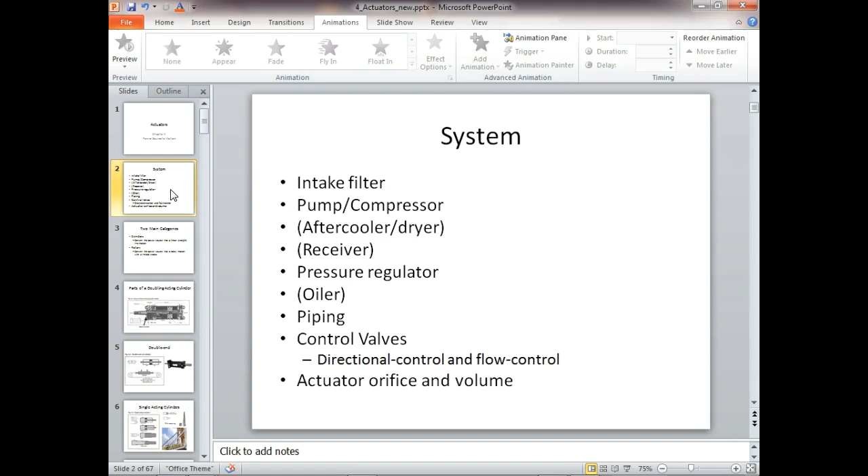Well, basically we had to deal with, well, we did a little bit with speed. That force is equal to pressure times area.

But you got to remember, if you got a cylinder that's a single rod cylinder, we do have multiple rod cylinders. We have dual rod cylinders. If you got a dual rod cylinder, that means you got a...

Let me go ahead and start this one, so I have some place to write.

Well, if you got a dual rod cylinder, this would be a symbol of a dual rod cylinder, where we have a piston, and then we have two rods coming out the same size. The rods would be the same size, so there's no such thing as push and pull. Here we would have to say left, right, up, down, or something like that, because there's no push and pull. But if I've got a single rod cylinder, which is all our questions are written up on...

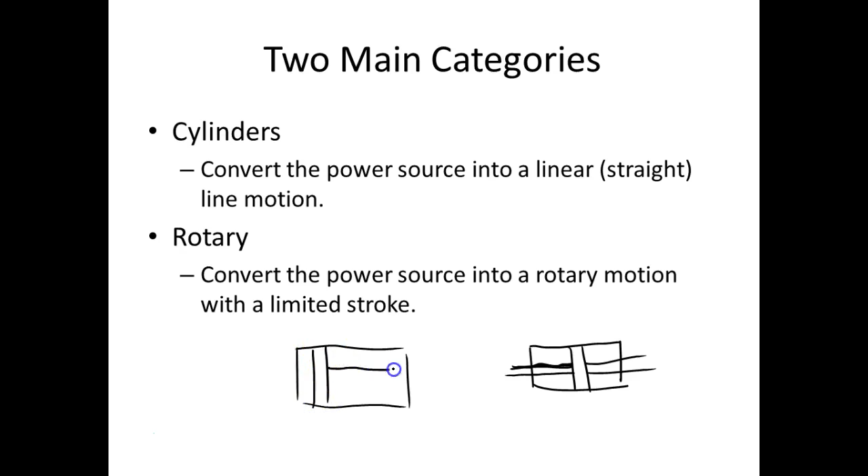And so what I've got, if I'm pushing on the bottom, I've got the complete diameter that I'm pushing against. If I'm pushing against this side right here, then what I've got is this diameter right there, because that's the only place I'm pushing on. All the rest of it is pushing into the rod. And of course that doesn't cause any problems because the pressure is equal all around that rod, right? And the rod can't move, so you can't move it left or right.

But what we have here is a piston, and we have a low pressure side and a high pressure side, and now we've got high pressure and it's going to move it toward the other, but it's only the area that it's pushing against, right? So the formula is force is equal to area times pressure.

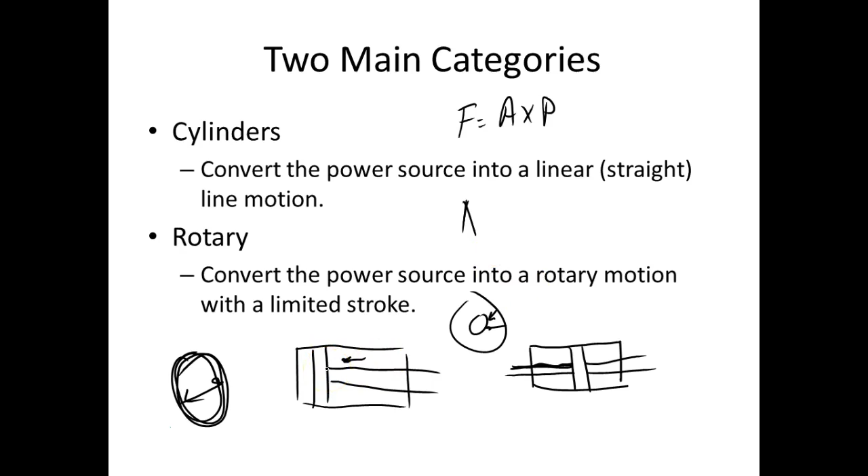Well, if we're extending, then that's true. But if we're retracting, or what is also called a pull - push would be pushing it out, and pull would be pulling it back, right? Then your force is going to be equal to the area of the piston minus the area of the rod, times the pressure.

Because that's what we got. That's what we got pushing, right?

I don't know, and I think in that question that would be true, because I think we had a 4-inch cylinder. You got that backwards - the big area is the area of the piston, which I think was 12.57, right? And you're going to subtract from that the area of the rod, which was 7.66. And that would be the amount of area you have when you retract it.

Yeah, the push would be the extend, and the retract would be - I think I went in on the retake, and I actually went in because that question got asked a little bit. I put in parentheses retract and extend, and I went back and put that on the actual test too, so y'all wouldn't get those confused.

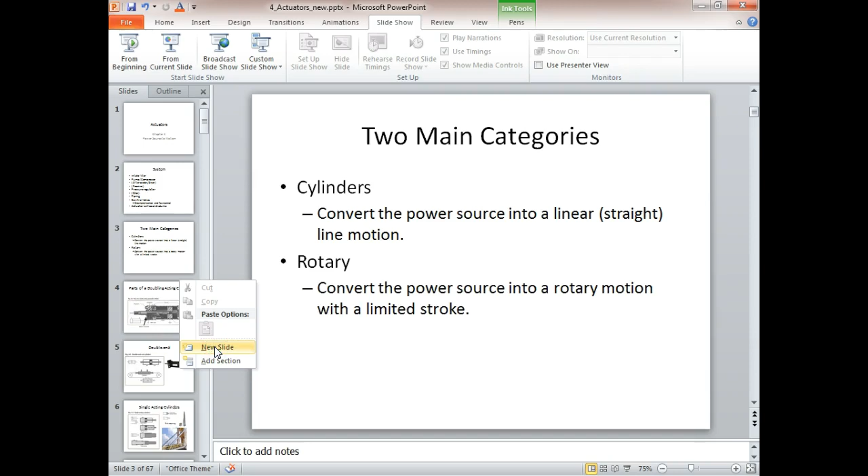So what does it say? By area. And of course that's a relative term because that's cubic inches per minute. And the problem is our flow rate is given in gallons per minute, right? So what we have is a conversion factor.

And what is the speed? It's got to be in some unit, like miles per hour. When I give speed, I give it in 2 units - how far with some time. For this formula it's different. We said a different formula in the handout I gave y'all, because that's in feet per second. But the one in the formula book is cubic inches per minute. No, that's the flow rate. That would be like saying how fast you're going, and you say cubic miles per hour.

So what speed is given? It's going to be in inches per second, or inches per minute. So your flow rate is a volume, your speed is a unit over time, right? You understand that? So this formula they give you in that book is inches per minute. And of course the one I gave you on the formula sheet is feet per second, but it's no big deal - it's the same thing. In fact, it would be easy on a short cylinder to use inches per second.

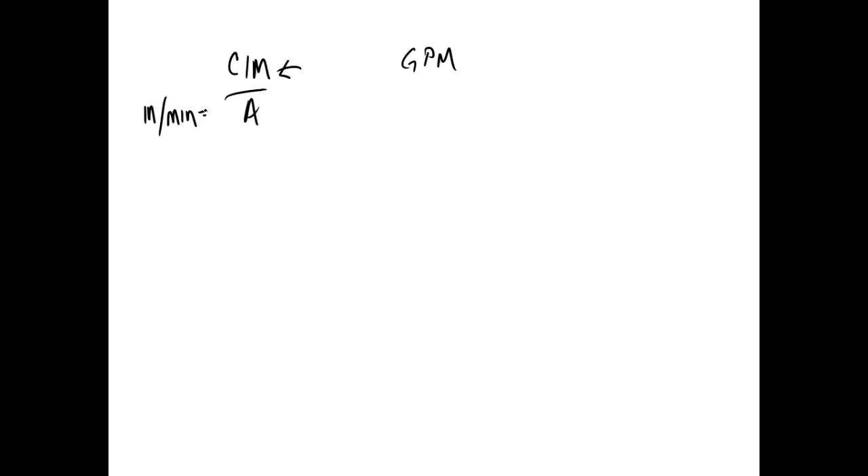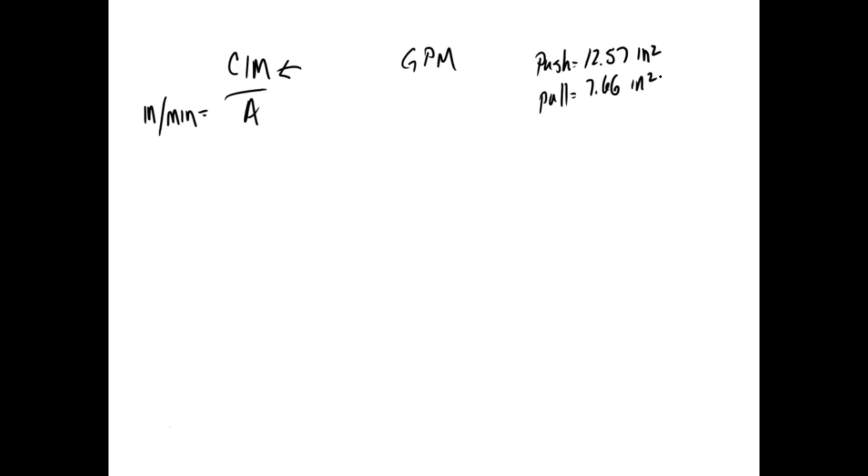Okay, so first thing I got to do is come up with what it says - the speed we got. So what's our 2 areas? My push area I think is 12.57, and then my pull area is 7.66, I think, if I remember right. Okay, so that gives us the number we put on the bottom. Now we got to come up - my flow rate is 8 gallons per minute. So somehow I got to go from 8 gallons per minute to cubic inches per minute.

So what's the conversion rate for hydraulic fluid? It's in there somewhere. And that's what's a little nicer about using the formula sheet - it gives you the conversion factor for gallons per minute to cubic inches per minute. This is nice, guys, but you got to understand this is a pretty common thing that we use. If it's pretty common, odds are in this book there's a table out there somewhere where you can look up your area and compare that to a flow rate, and it gives you the speed.

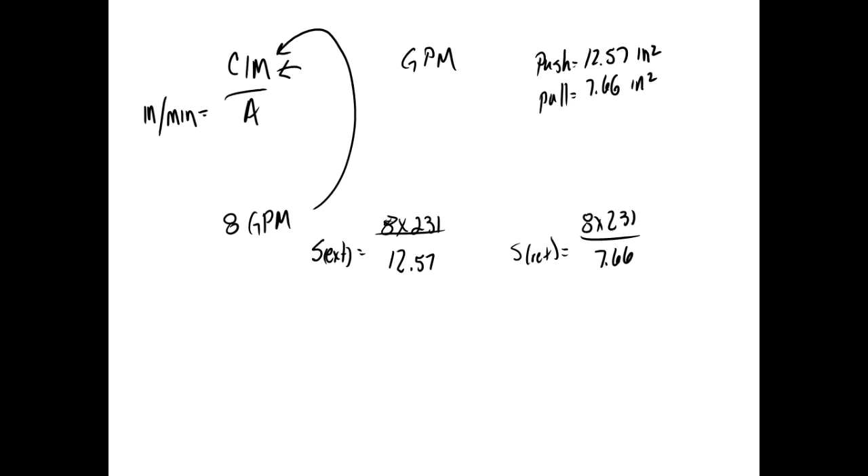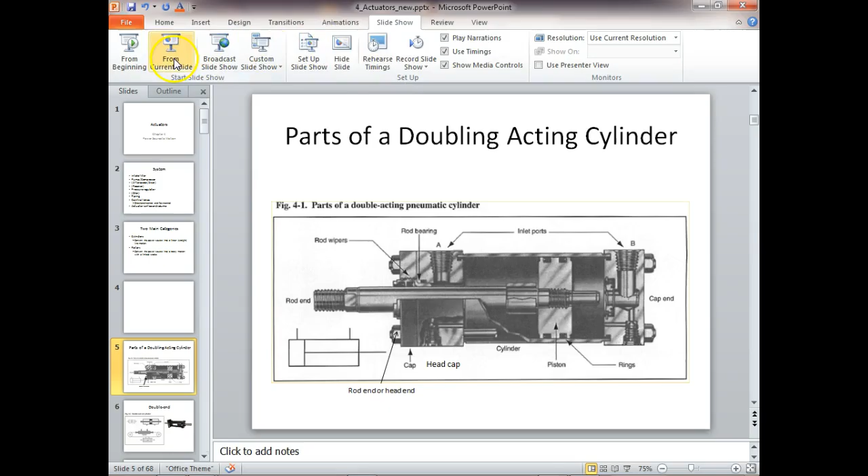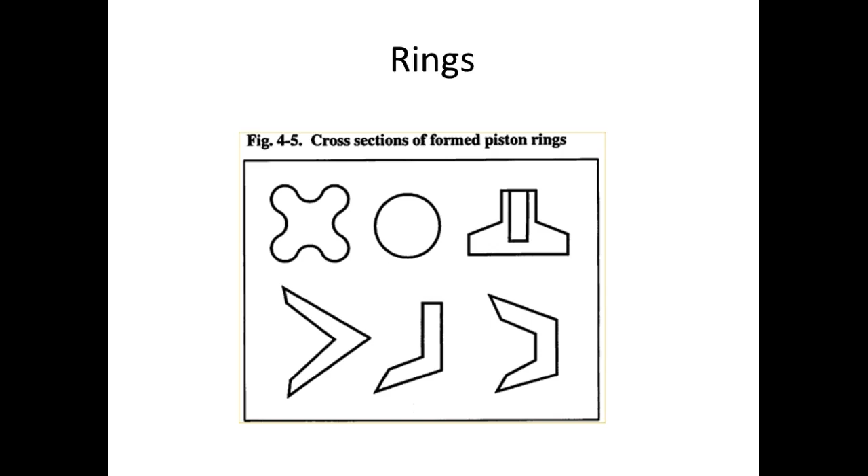We looked at the different types of cylinders that we could get. We didn't talk much about the rings or the seals that they put inside these things. We talked about the different ways of mounting the cylinders. This was pretty interesting too, they give you the illustration.

Unfortunately I hadn't been able to find one for hydraulics. But if you look under course content, then there's one in there called reference materials. There's a really good data book that I don't know if you want to download it or put it on a thumb drive, especially if you get out of here. This is Mead's Pneumatic Application and Reference book.

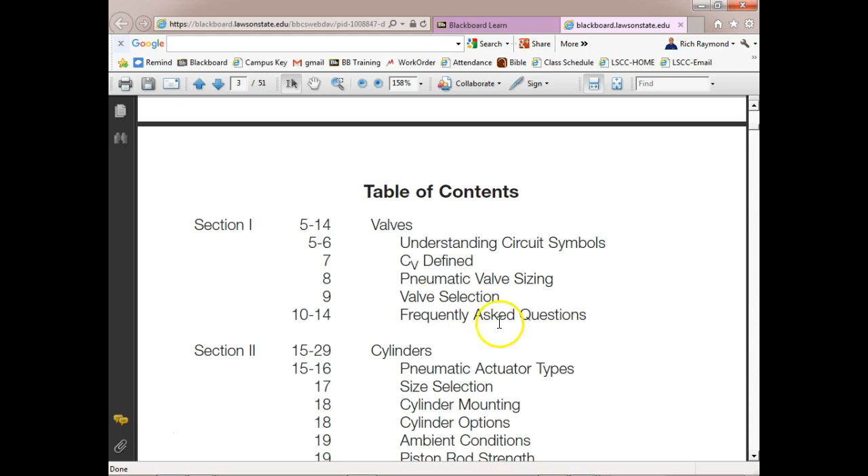And what we're going to talk about in a minute is something called a CV, it's a coefficient of velocity. But another thing that I like that they provide in the book is they give you all the symbols. These are pneumatic symbols, but a lot of them are crossed between the two systems, very, very similar. We do hydraulics a little different. On pneumatics, what we do to regulate pressure, we use a pressure control valve. What we do on hydraulics is we use what we call a pressure relief valve, and we'll look at the difference there. But there's very similarities on what we do there.

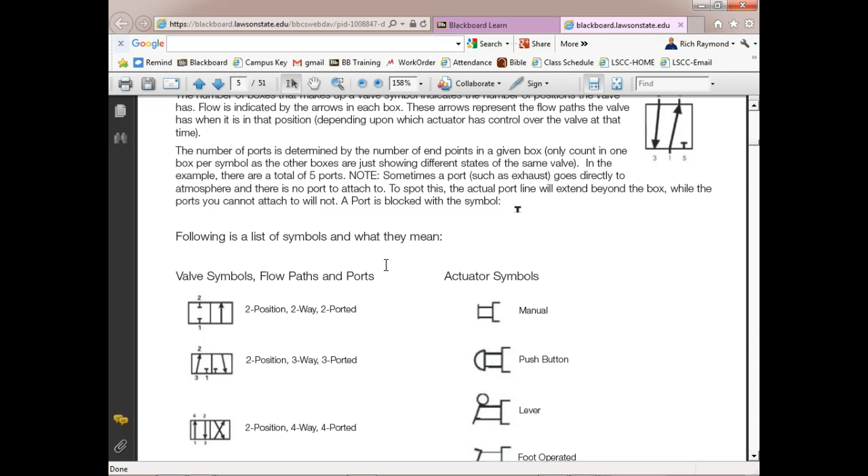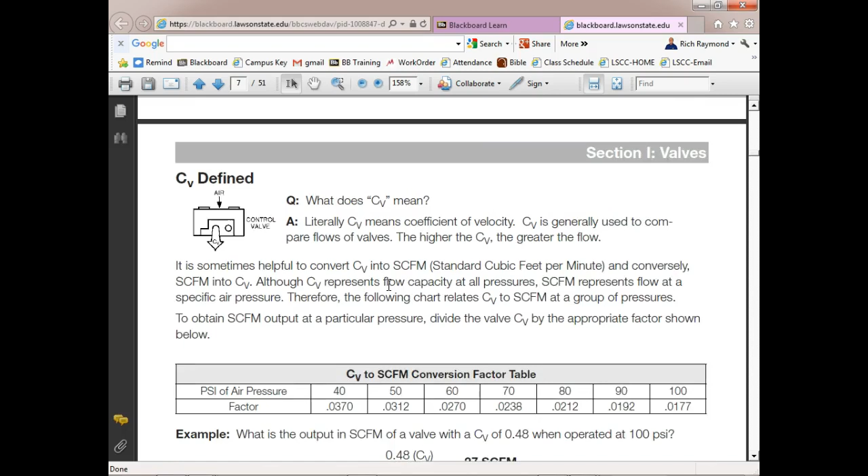And the different types of valves, the different types of operators. And then this is CV, we're going to look at that in a minute.

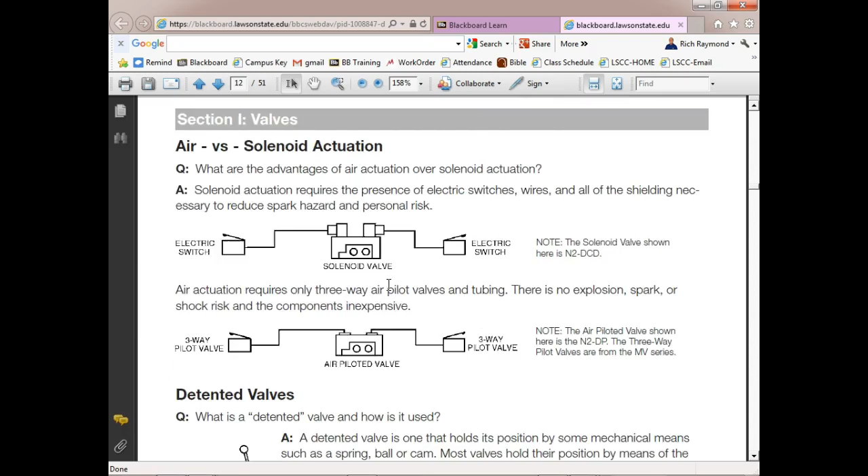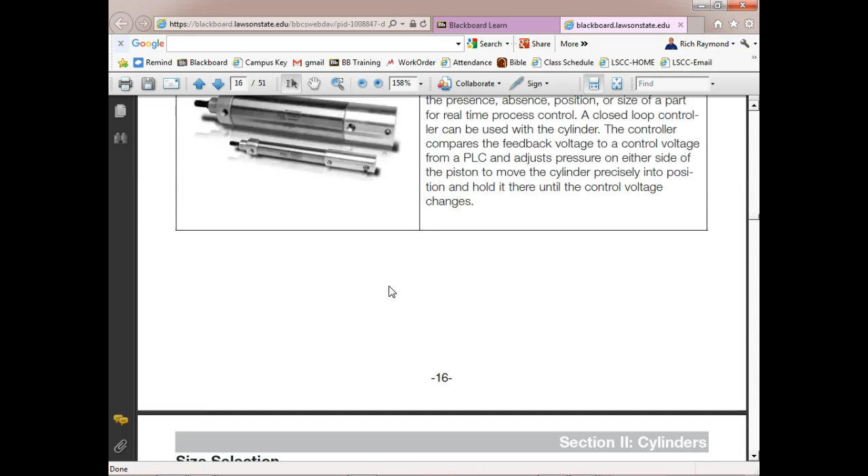And then another thing that I noticed that is pretty interesting, if you think about it this really comes into play, is how much force you need to generate to lift the load. Well, how much force do you have to generate to lift the load? Well, it actually depends on the angle that you're trying to lift it.

Yeah, this book is on blackboard. And of course we're not going to deal with this on the test, but this is just some place where you get out there and you got to calculate how much force you need, or what size cylinder you need, or what size valve you need to run a system. And most of that stuff is out there available to you, so you don't have to do a lot of math, you can look them up in charts. But there is some math involved. So what actually determines the amount of force required to lift the load is the angle that you're trying to lift it at.

So as the angle goes up, you would have to use trig to calculate this out. What this would do is tell me a multiplier that I would use to determine how much force I need to generate to lift the load at an angle.

Of course, if you're lifting it straight up, then you just got to lift the load, right? But if you're pushing it out, then you not only got to move the load, but you also got to overcome the friction that the load is pushing. And then when you start changing that angle, the actual weight is distributed on different angles on what you're pushing, right? Does that make sense?

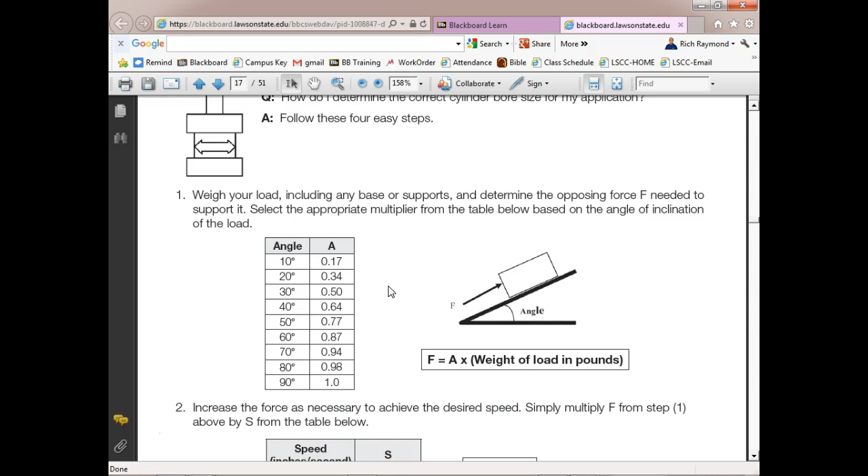So this is a neat thing. But what I want to do now, guys, is ask: do y'all have a formula for the CV rating of a valve?

So what we've got to do is, if I'm going to run a cylinder and I'm trying to run it at a certain speed, then I've got to assure that I get the flow to the inlet of the cylinder. So what sets the speed? It's not the flow in the system, it's the flow that comes into the inlet of the cylinder, right? So what determines the speed is basically the flow rate.

Of course, what determines the force is how much pressure you have. So we could have a lot of pressure in a small flow, or we could have a lot of flow in a little bit of pressure.

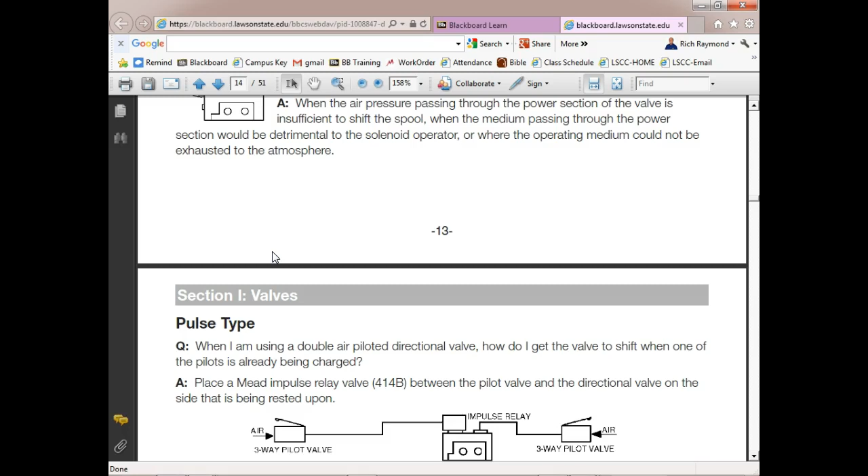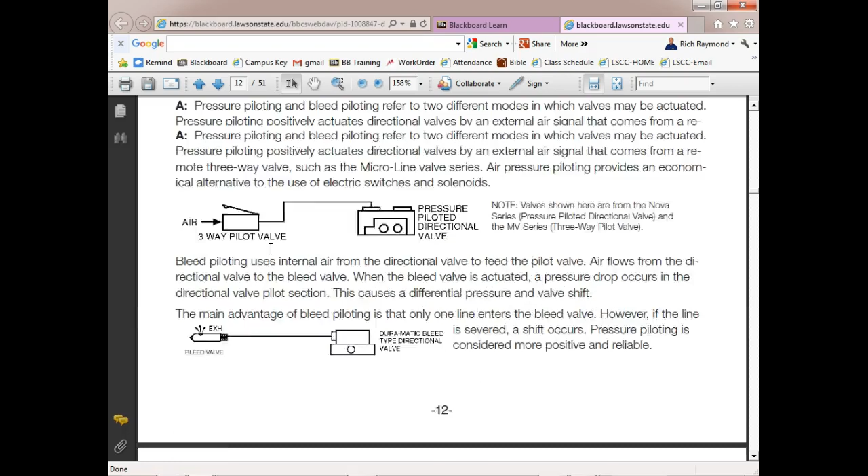So the CV rating of a valve is basically how efficient it is at moving fluid through the valve. And this is a U.S. customary rating, so if you get into valves that are used a lot outside of the United States, then you probably won't see a CV rating on a valve. But if you get into a company that sells a lot in the United States, even though they're a foreign company, odds are they're going to list that CV rating on the valve.

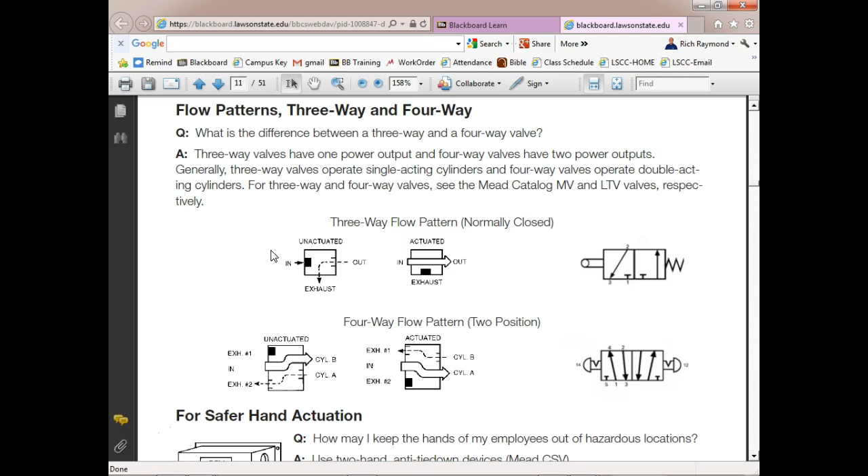So when we buy compressors, two things it's going to give us: the maximum pressure that it can generate, and the flow that it can maintain at different pressures. If you ever look at a compressor, it'll give you basically two values. It'll give you the maximum, so at the maximum pressure, you should have the minimum flow, right? And at the minimum pressure, you're going to have the maximum flow.

So if you ever look at a standard compressor that uses an intermittent motor and a reservoir, it's going to give you two flow rates. Usually it gives you what we call standard cubic feet per minute. And what is standard cubic feet per minute? What is it?

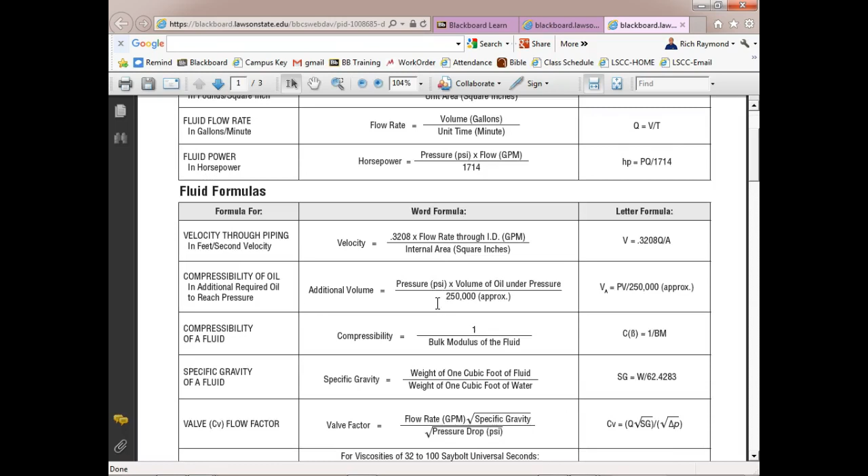So this sheet right here, here it is. Valve CV flow factor, so this is the formula right here. So what do I need to know? The valve factor, I need to know the flow rate in gallons per minute. And what do I need to know? The specific gravity, right, divided by the pressure drop. Not the pressure, it's the pressure drop.

So if you look over there on the right hand side, it gives you a break. Normally in engineering, if we use a change in, meaning I get a different value on this side than that side, or vice versa, we use the Greek symbol delta. So delta means a change in. So if I've got 60 psi out and 65 psi in, then the delta P would be 5. You understand that? We'll run into that a lot, especially in electronics. We ran into it last night in my solid state class, where they had the little delta, and it was a change in one current relative to the change in another current. But you'd have to know the change, how much it changed.

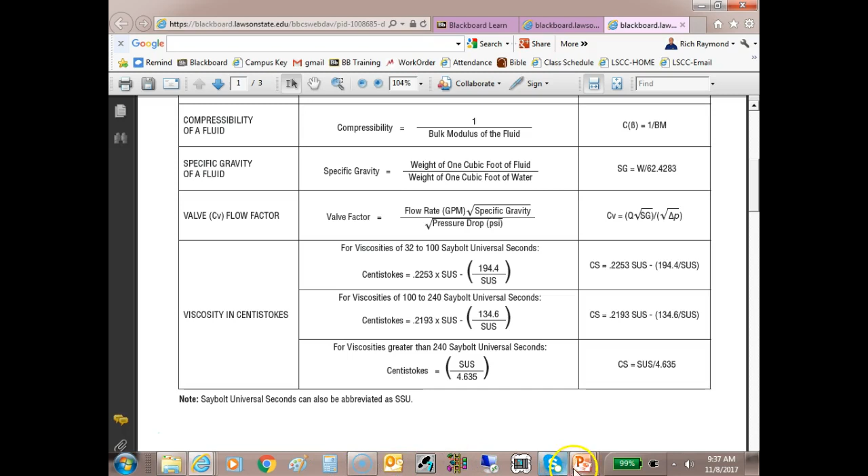In this book, since this is related specifically with pneumatics, it makes it a lot simpler. So this tells us right off the bat, if I know my gallons, if I know the CV rating of my valve, and I know the factor according to the pressure that's moving that thing, then I can calculate the number of cubic feet per minute that I need. That makes sense?

Or if I know my cubic feet and I know the factor of my valves, then I could flip this around and calculate the CV of the valve that I need. So what would be the formula for the CV rating of the valve? Can you see the formula is using cubic feet per minute equals CV over a factor that they give you out of a table.

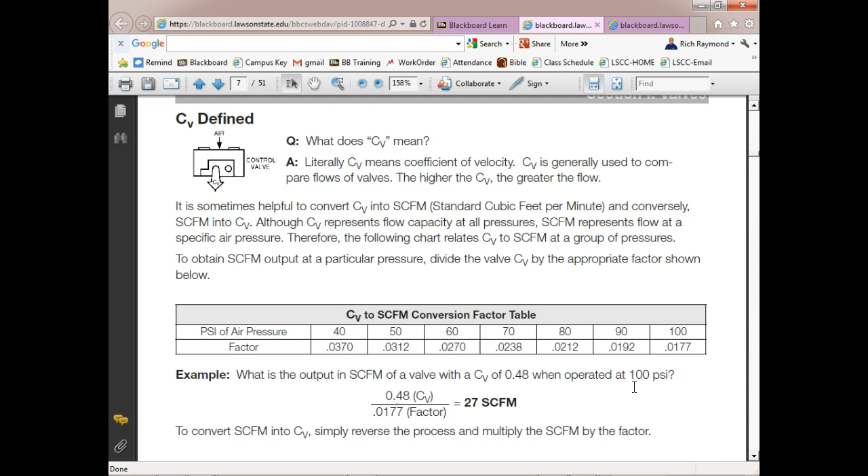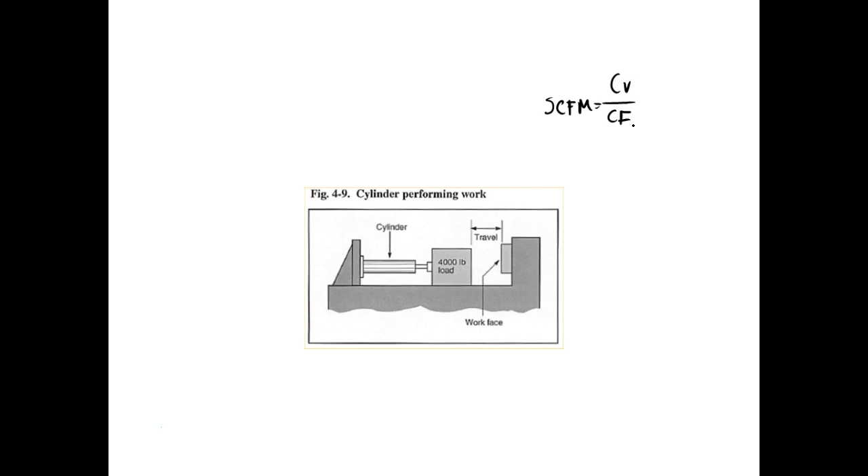So standard cubic feet per minute equals the CV over a conversion factor. So that means if I knew the standard cubic feet per minute that was available for my compressor, how could we solve for CV? We could put it in our little formula: standard cubic feet per minute, CV over conversion factor. So my CV would be equal to my standard cubic feet per minute times my conversion factor.

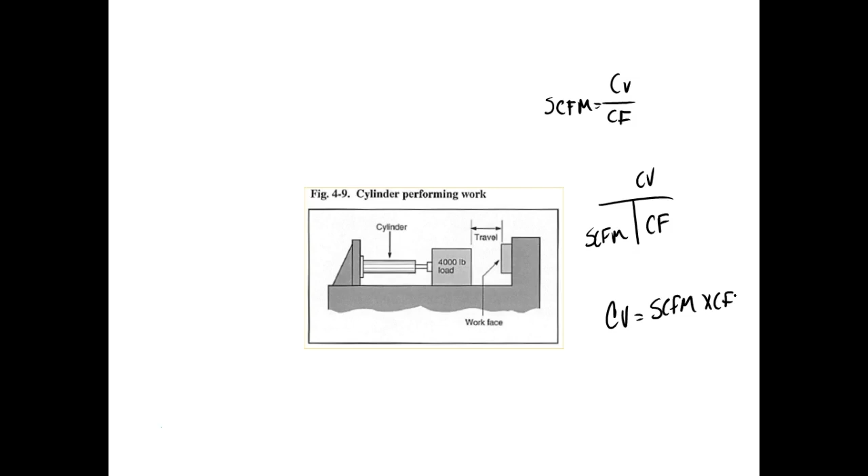So what I could do with this is figure out what size ports I need on my valve to handle that speed. And another thing I like about this, and like I said, I couldn't find it... so this is the formula they give.

First of all, when we talk about a cylinder, what we're trying to do is calculate what size valve I need to cause a certain size cylinder to extend its rod at a certain speed. And this is the formula.

So first of all, the fluid comes flowing in there. What's the first thing it's got to do? It's got to occupy a certain amount of volume, right? So first, we need to know the number of cubic inches or whatever is inside that cylinder, the displacement of that cylinder.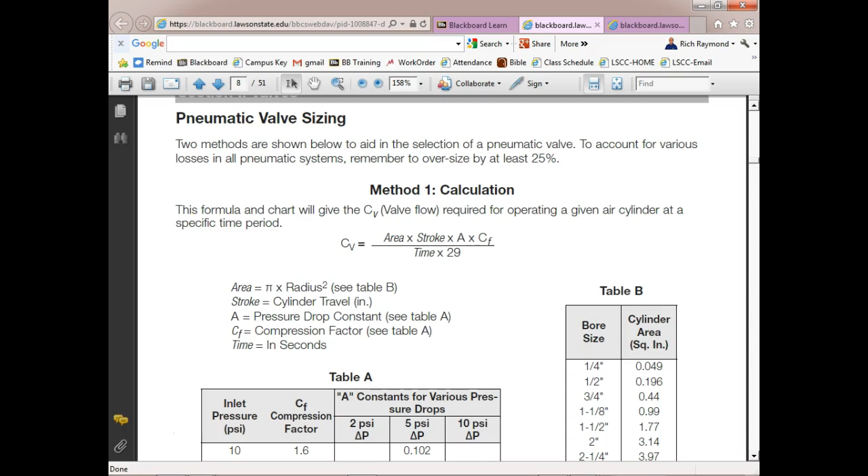Then I need what they're calling A, and these are your conversion factors. This is dealing with the amount of pressure drop that you want through the valve. I cannot send flow through a valve without losing any pressure, that would be impossible, right? Understand that. So the ones they give you in your chart are a pressure drop of 2 psi, a pressure drop of 5 psi, and a pressure drop of 10 psi.

So 2 psi would probably be your bigger valves, and they would be more expensive. 5 would be in the center, and then your 10 psi pressure drop, these would be your smaller valves. So that 10 psi drop through your valve would be what? That would be your cheaper valve. Everybody understand that? So normally, which one would you think we would probably use?

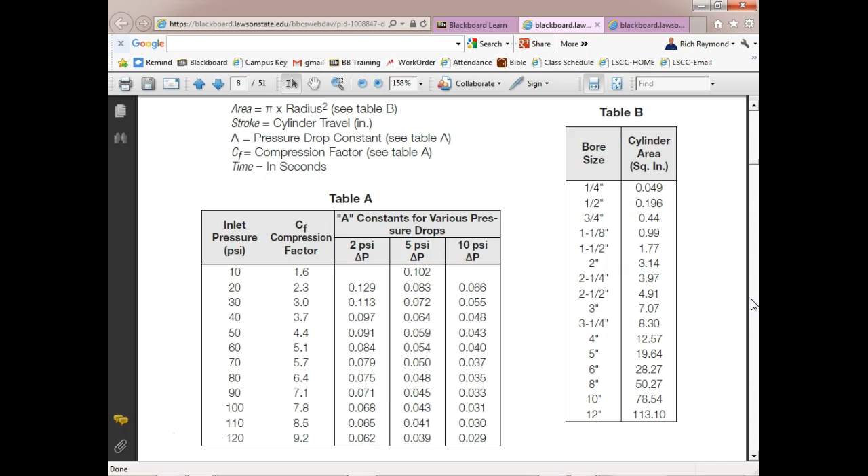So let's say I've got 60 psi, and my cylinder's got a 4-inch bore, and we wanted to extend in 5 seconds. Do I have enough information? Let's see, what else do we need? Oh, and we need the stroke. Let's say it has an 8-inch stroke.

So in time, I wanted to do it in 5 seconds. Okay, so we got enough information. Go write that down. So I got 60 psi, I've got a 4-inch bore, and it's got an 8-inch stroke, and I want it to extend in 5 seconds. Are we okay?

8-inch stroke. So the first thing we would calculate would be the volume. So I would take the area. We know the area of a 4-inch bore, we've already done that, it's 12.57, right? So I'd take 12.57 and multiply it times the stroke, which is 8 inches.

Yeah, that's just me, I made that up. Are we okay? Everybody doing the math? You doing the math, Jacob? Jacob, you doing the math, or you? Okay, I didn't see that. So what's that? What would be the volume?

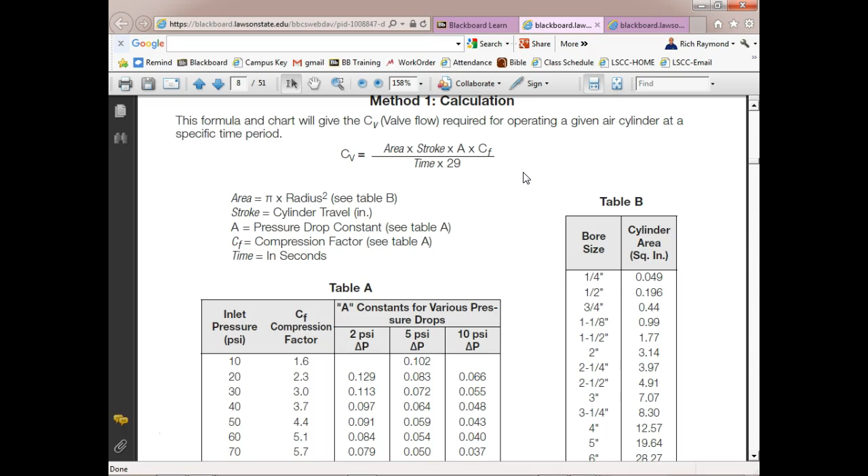Everybody okay with that? Okay, then I would come down here and I'd look at this chart right here, and we're going to do a 5 psi drop, 60 psi. So my A value would be 0.054. Yeah, 0.054, because it's in the chart.

All we do is we say, okay, what pressure drop do we want? And we chose 5 psi through the valve. But what I did is I looked up my pressure drop across the valve, and that's what the delta P means. So that means, if I'm putting 60 psi on the inlet, I would be getting 55 psi out, if I use this size valve, right?

You understand? Okay, so A is the pressure drop coefficient, I guess you'd call it. So all I do is come over here and say, okay, my A value would be 0.054. So I take my volume and multiply it by 0.054. Everybody okay?

And then I would take that answer and multiply that times 5.1, which would be my coefficient. 5.1.

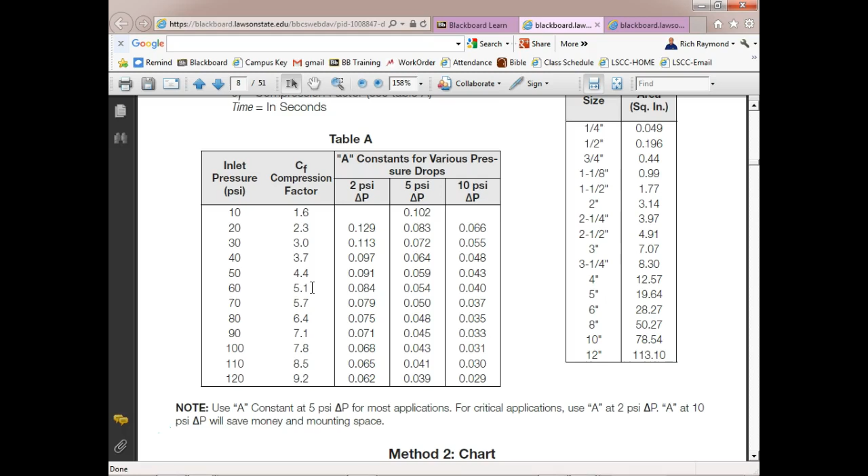Okay, then what I'm going to do is come up here and divide that by the amount of time. What did we say, 5 seconds times 29, which is a conversion factor. 27.7 over 5 times 29. Yeah, that's it. And that would give me the CV value, the minimum CV value that I would use.

Now you could use a bigger one, but you better not use a smaller one. So if it doesn't fall onto a standard CV value, what you would do is always go to the next standard size, go up to the next standard size.

Wait till we finish this. So what we got? Don't know. Okay, so we look at a CV rating of like 0.2, right?

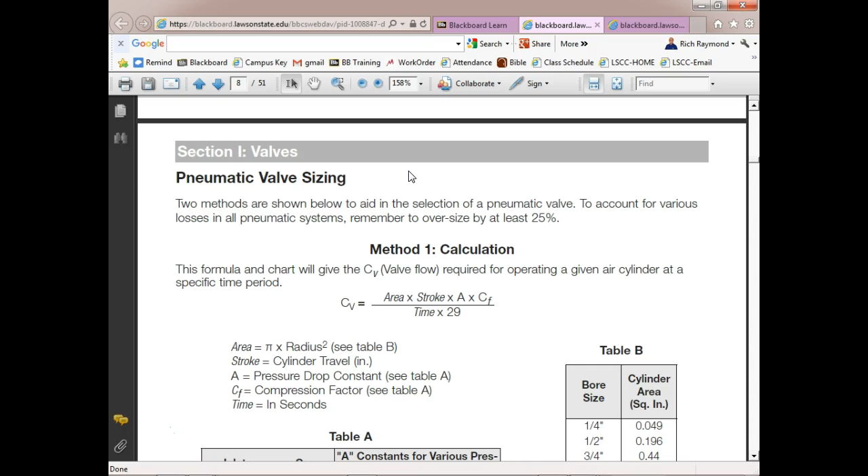Okay, so let's write the whole thing down. I got it up there. Okay, so here's the formula right here. So my CV rating has got to be equal to the area. So I'm going to come up here and say 12.57, okay, yeah I got that, times the stroke. The stroke would be equal to 8, times A. So I go down here and type the table A, and I look at my pressure. It says 60 PSI with a 5 PSI drop.

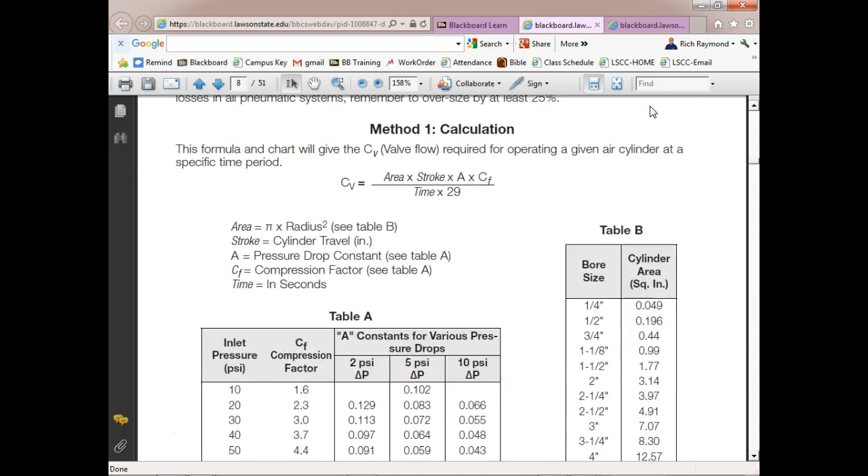Okay, 60, so there's A. Here's 60 PSI. I come over to my pressure drop of 5. So I'm gonna come up here and multiply this by 0.6. I don't know how much that's going... 0.064, it's 0.054.

60, okay, I'm sorry, I had my glasses down. But I had got that. Then the coefficient of compression, so this would be times 5.1.

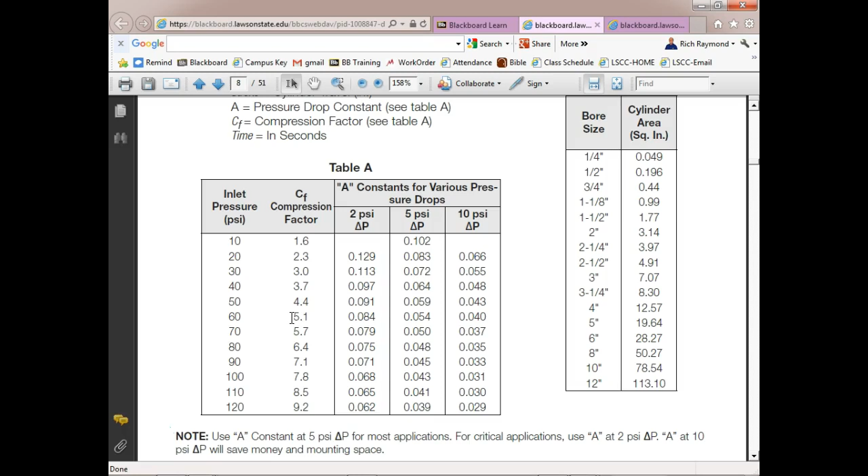Then I'm going to take that. You can enter that together down here. You're going to have to do this inside parentheses because you've got two things down here, right? Okay, go back to the formula.

Okay, so that'd be times 29. Yeah, so the time, we want 5 seconds. Yeah, I was tracking that. Times 29, which is a constant. And that's since I put, that's what I keep forgetting to do.

Well, the problem is if you put 5, it's going to do the 5 times that first, well it's going to divide this by 5, yeah, and then it's going to multiply your answer times 29. That's what I'm missing. Okay, so if you don't put it inside parentheses, that's what it's going to do.

That's what I did. So as soon as you come up here and add all that, you put 5, then you hit the times key. If you don't put it in parentheses, it's going to take this and divide it by 5 and multiply that by 29. Okay, you understand? And that's not right. What it is, is this.

Now, what you can do first is just make a note. You could come over - if you don't want to use parentheses, I'll just clear this out and I'll do the 5 times 29 and put equal, and I'll write that down. I'll put 58 over there. Okay, you can multiply before you put it up.

Yeah, just do it by itself, before you do anything, right? You understand? And maybe put it in the memory of your calculator. So that's one way - I could say 5 times 29. If I don't want to use parentheses, I do the bottom, everything on the bottom first, and hit enter, and then I'd store that in memory. Okay, we're going to store that in memory A.

Yes, I don't know - I have to figure out how to use your memory. Looks like you got many memories. I don't think I had any yet. There it is. So 5 times 29 equals. How did we come up with 58 over there? 5 times 29 equals 145.

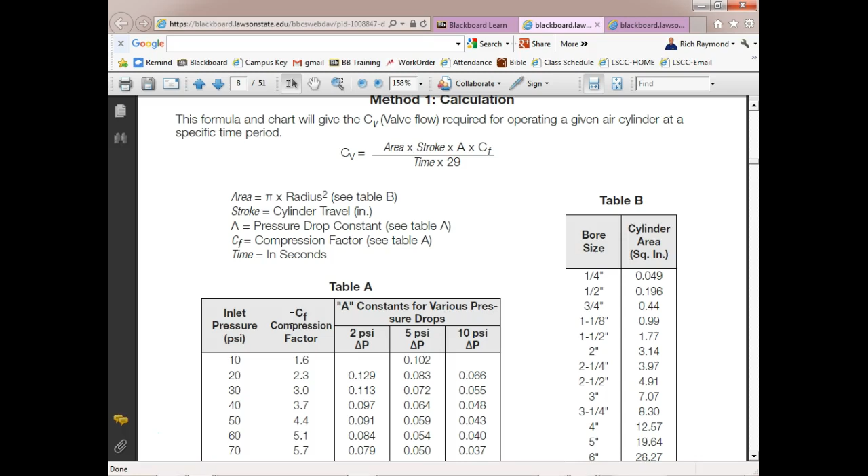Yeah, that's what it means, if you're using negative force, you understand, which means the negative force means I'm not trying to push the weight up, I'm trying to lower it down. The problem is when I'm lowering it down, we have a negative force. So what happens is we got that negative force trying to pull that cylinder, trying to pull the rod out of the cylinder. So what that means is the rod has a tendency to drift.

Yeah, it'll slide down. If we had meter out, it wouldn't do that because the exhaust is going to hold that back pressure.

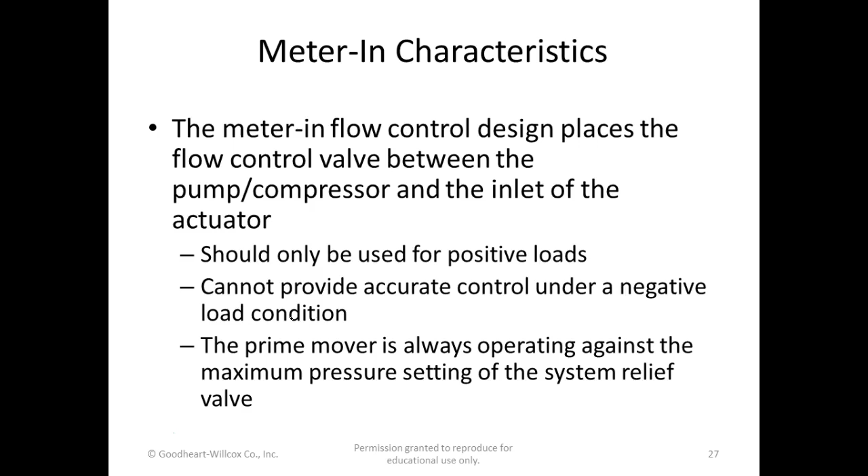So this is the hydraulic symbol. We start off, now look, this is the way we regulate. On pneumatics, we put our pressure regulator in series with our compressor, right? On hydraulics, we don't use a pressure regulator, we use what we call a pressure relief valve. And y'all see what the pressure relief valve does.

So let's look at some symbols. Anybody know what this is a symbol for? Reservoir. Now most people call it a tank, but it's technically known as a reservoir, if I can spell it. This is a symbol of a pump.

Sometimes they'll put a rod coming in over here, and they'll put the prime mover. Pumps don't work without a prime mover. Normally we either use a combustion engine or an electric motor, but we could use water, we could use a turbine, like the prime mover for the generators we have, which push our electric power - those use steam or water. So we use one or two things as prime mover.

This is a pressure relief valve. So what would happen is that if I set this for 500 psi, then that means anything over 500 psi would be vented back to tank. And that would maintain 500 psi on the hydraulic system.

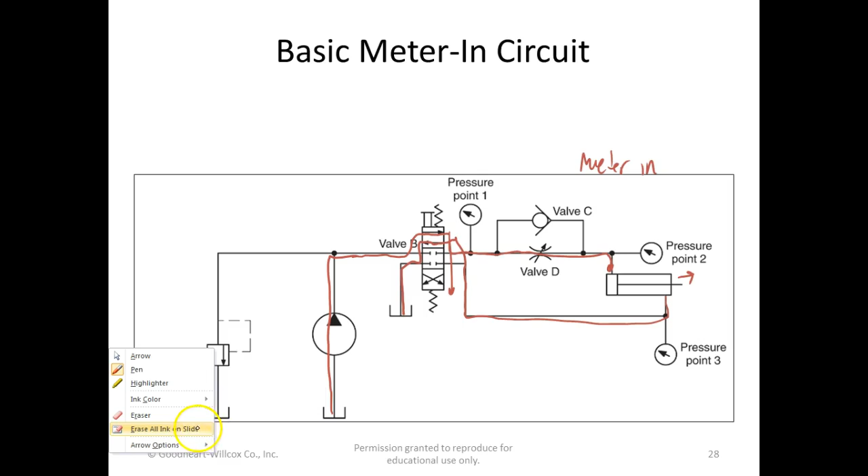If I come up here and retract it, so now we're shifting it back the other way. Here it comes out of my tank, comes up through the pump. Now we're going to go through this guy. It's going to come through here, go here, which means it's going to send it out this one. It's going to come over here and it's going to hit that. Okay, which is going to cause it to retract. It's going to come out here. Which way is it going? It's going that way, right? And then it's going to come back, and then it's going to come out the bottom and go back to tank. So we're meter in on extend.

We don't do any metering on retracting. So what would happen is we're controlling the extend speed, but retract is going to be extremely fast. It's going to be determined by the flow rate of the pump, not the flow rate through the flow control valve, right? You understand that?

So this would be meter in on extend. If I wanted to meter in all the time on both extend and retract, then what we would do is we would come down here and put the flow control. We put another flow control valve right here.

And if the arrow points toward the cylinder, it's meter in. If it points away from the cylinder, on the check valve. So what we do is just look at the check valve. If it points toward the cylinder, if the arrowhead on the check valve points toward the cylinders, it's meter in. If it points away from the cylinders, it's what? Meter out. So it's real fast.

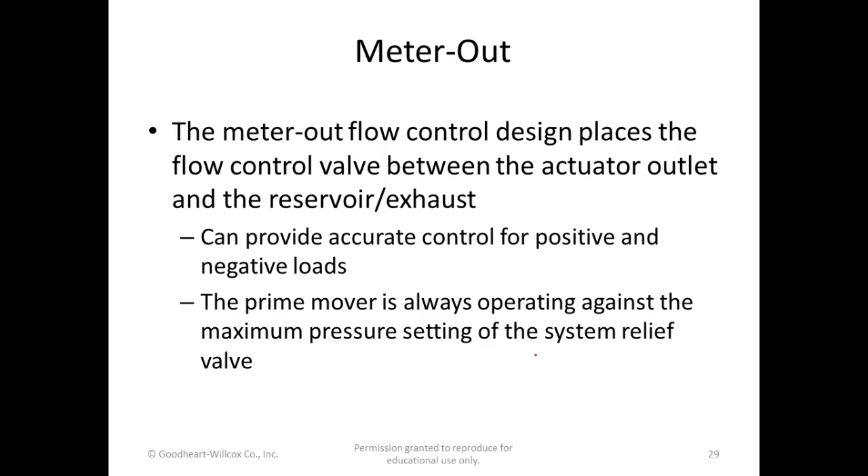Meter out can provide accurate control for positive and negative loads. Prime mover is always operating against the maximum pressure setting of the system relief valve.

So this is meter out. But notice, how do I know that? Just by looking at it. I look at my unidirectional flow control valve, or one-way flow control valve, as they call it. I see that on my check valve, the arrow is pointing out, pointing out means meter out. Pointing in means meter in. That's the best way to do it. Here we're not metering the... I'm sorry, we are metering the extend, right? Are you okay? Any questions?

The hydraulic symbol is this. First of all, hydraulic, we know we're in hydraulics right off the bat if we see one of these—that's the reservoir. Also, we know we're in hydraulics because the arrowhead is colored in.

So on your actuators, they do it sometimes on actuators too, guys. Over here, if you ever see this, and you come over here on these inlets and you see that little thing right there and it's colored in, then you know that is a hydraulic cylinder. Now here, it's not standard, but you'll see it all the time. But we can definitely tell on our motors, and we can definitely tell on our pumps. So if I come over here and draw this same symbol, and I put that arrowhead and I don't fill it in, then that's pneumatic. Does that make sense?

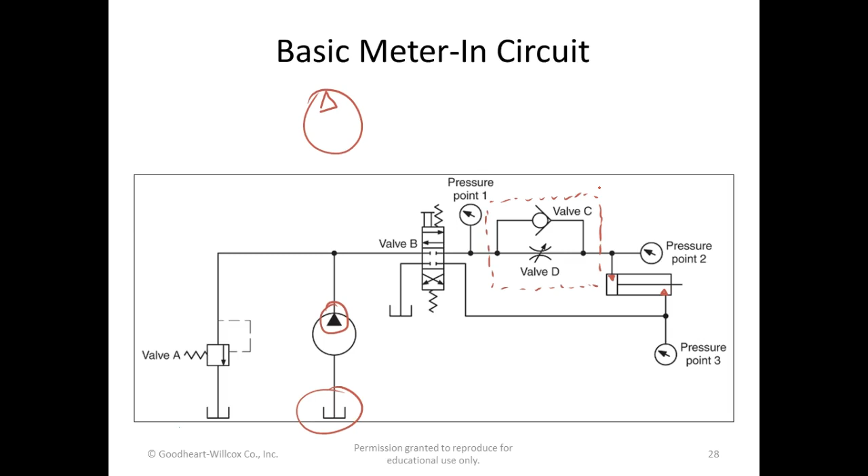But look at the similarities between a pneumatic system and a hydraulic system. There's very few differences right now. The only difference we see is how it regulates the pressure. So a hydraulic system uses a pressure relief valve, and a pneumatic system uses a pressure regulator, right? The pressure regulator is in series with the power source on a pneumatic system. It's in parallel with the pump on a hydraulic system.

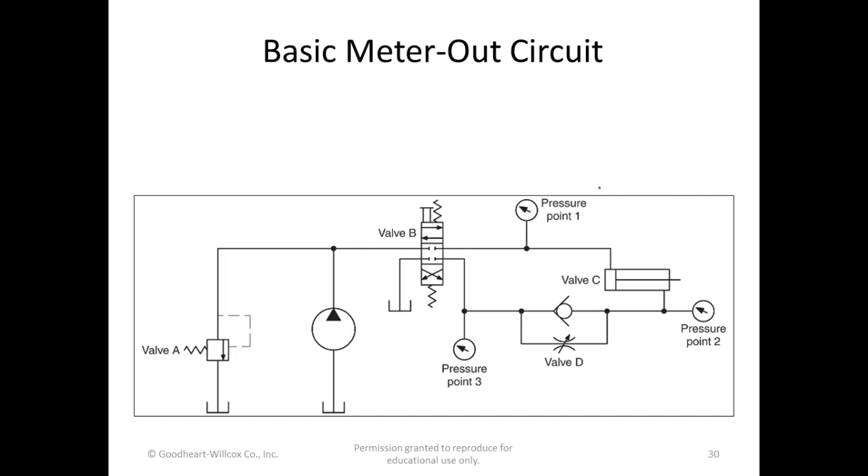Right, except for single acting cylinder. Alfonso didn't come back in, I don't know where he's at. That's okay, it's his responsibility to get back in class on time.

But you got charts that you can do this. So we got a chart that gives us the cylinder force, which is on page 15. But it would be a little harder to use because first of all, you have to have your PSI out there. You have to know your PSI. And then you got to know what? Yeah, you need to know the diameter. But you'd have to find it inside—you'd have to find your force inside of it.

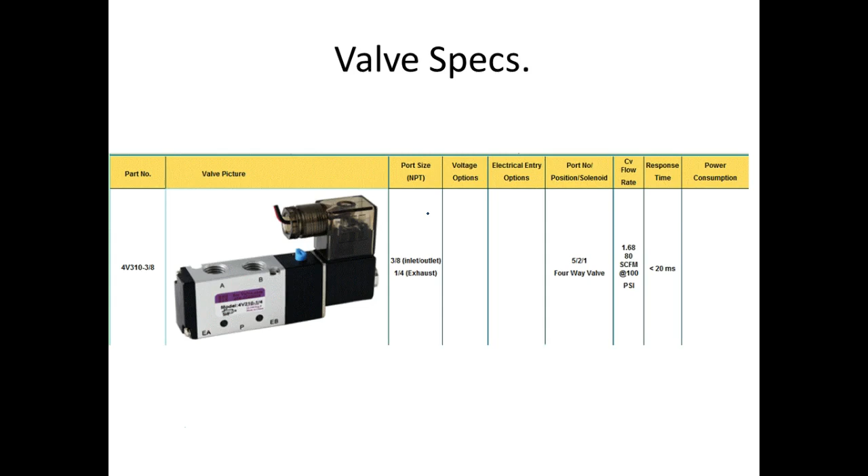And odds are you're going to see, that's if you have 80 standard cubic feet per minute at 100 PSI. Are we okay? That's in the chart again. We worked some problems, we've already done that. That's the same chart that was on there before.

Symbols, guys. We need to understand symbols. If we can't understand symbols, we can't understand. So is everybody okay on these? This is a symbol that we haven't talked about.

Normally, if you've got a piston and you've got a rod, what can the piston do? The piston can literally rotate, right? Well, if we don't want it to rotate, then we have to account for that. So that's a non-rotating cylinder. That means that sucker won't do what? Somehow inside there they won't let it rotate. Now how they do that, I don't know.

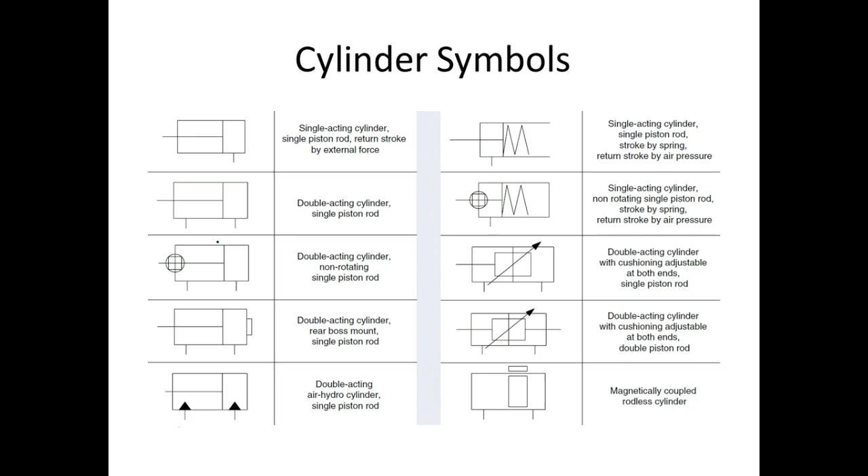Everybody okay on cushions? Yeah, so it says non-rotating, right? Everybody okay on cushions? What's cushions do for us? Well, what a cushion does is it actually slows it down before it gets to the end, right? They can be fixed or they can be variable. How do we know which ones are variable? Got the arrow to it, right? Everybody okay?

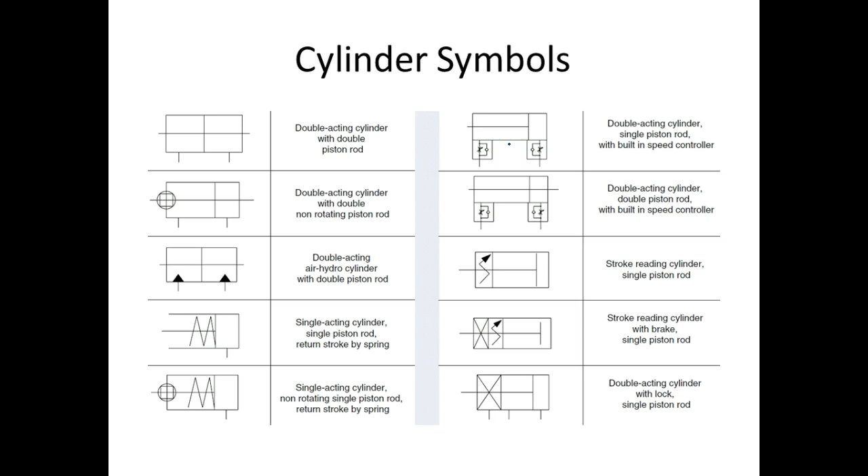So I can't help you on that, guys. But this would be, so if you went over, you can buy the cylinders with the flow control built into them. Now, of course, the cylinders would be cheaper probably to buy instead of buying the cylinders plus the flow control valves, but they would be more expensive to replace. That makes sense? Because if I had flow control valves separate, I could change the flow control valve. Here, if I got a problem with the flow control valve, I have to change the cylinder.

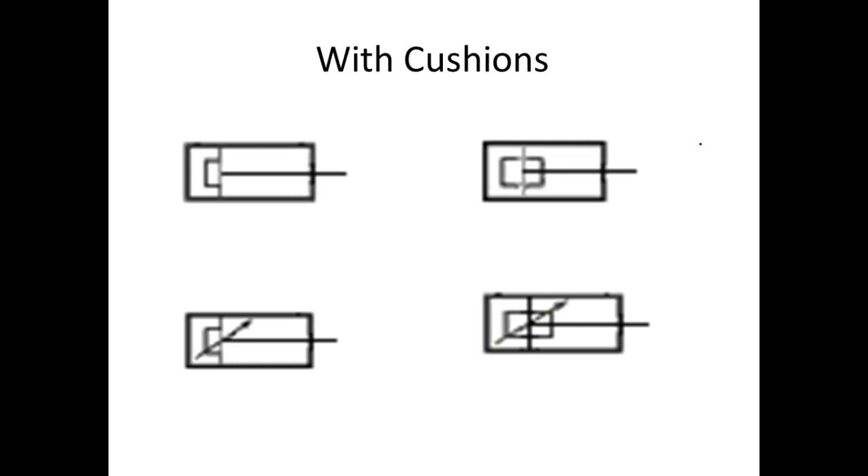With cushions, everybody okay there? Cushions would be, I think, way back on the very first. Okay, so what we have here, you notice when the rod retracts, it goes into a little slot. As soon as it goes into that little slot, then the fluid would stop, and it would stop right there unless it vents out. So you notice what we have here.

So here's the cushion right here. Let me put it in a color that y'all can see. So here's the cushion right here. So when this rod comes in here and seats in that, now the fluid appears to be blocked. But if you noticed, it's got little veins that come around here. So what happens is that when it hits this, it's going to flow, but it's going to be restricted because of the size of the piping coming back.

You can't see it right here, but what we have right here is there's check valves in here too, but you can't see it. So it's got check valves, and then also what we have is down here we might have a screw, and then I can come in here and vary the size of the orifice. Well, if I can vary the size of the orifice, then I can control the flow coming from the cushion. Does that make sense? So what happens on these is they'll be flying, and right when they hit the end, they're going to slow down real fast. So they're not going to ever hit against the side, right?

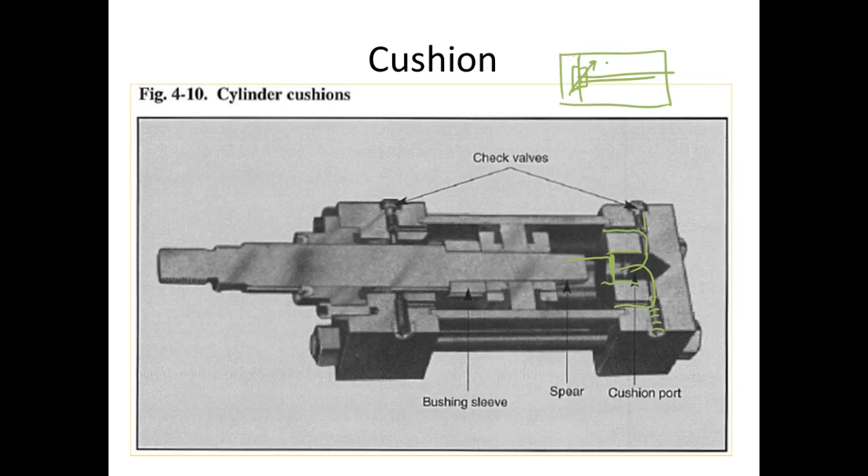So this is like your car. When you're going to bring your car to a stop, what do you do? You slow down before you come to a stop. Anytime you come up here and you beat something up against the side, you're going to have problems sooner or later. So they do have, those are not usually indicated. A lot of times they'll have like a rubberized thing up against the caps, so it don't actually hit the caps, it actually hits that thing. I forgot what they call that. No, it's called something else.

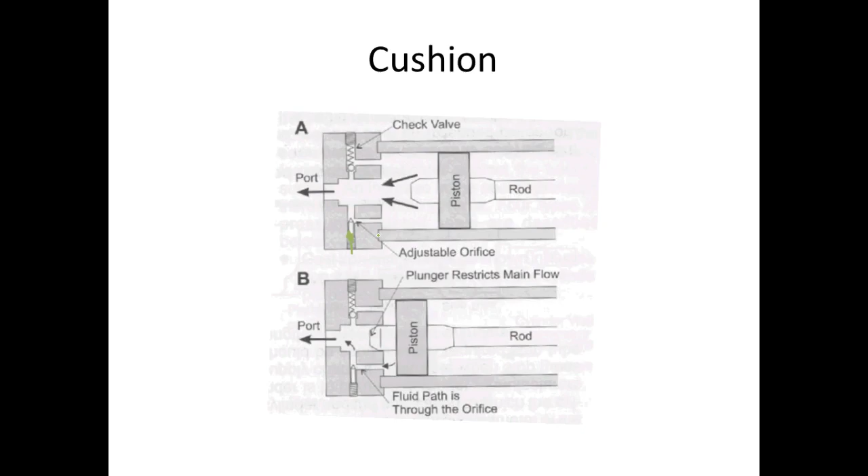So this is really good on your cushions right here. So on this one right here, if I can adjust this guy right here, then I can adjust how much it flows back through that back channel, and I can control the speed of the deceleration. So that answers your question. Okay.

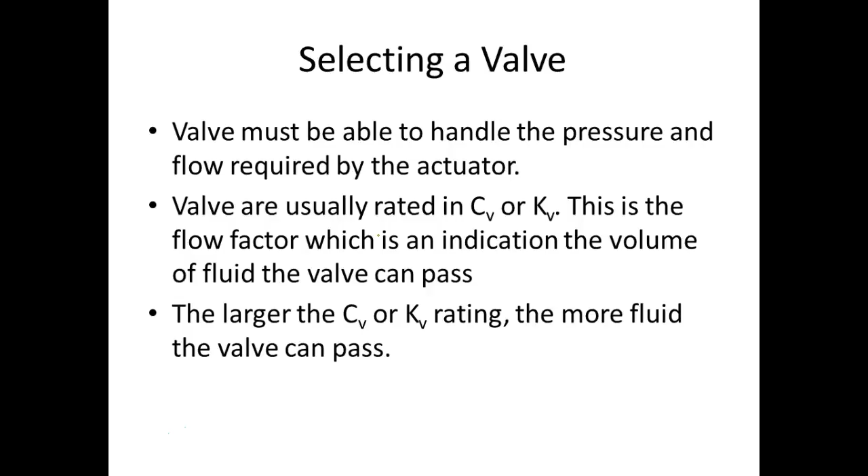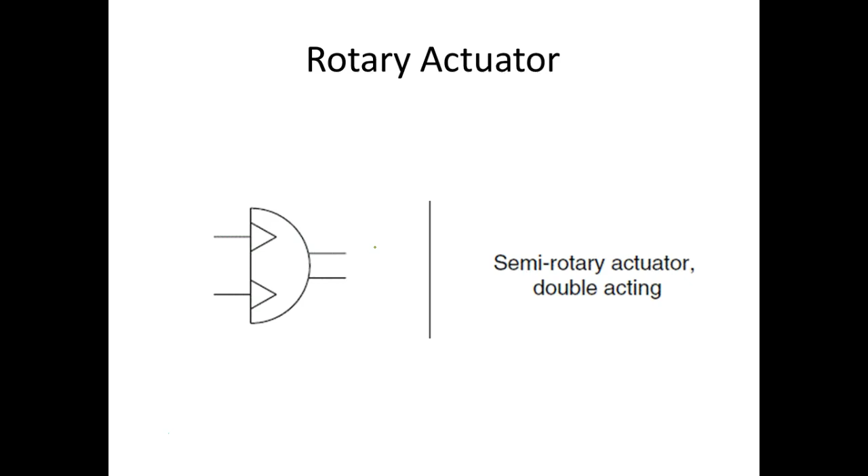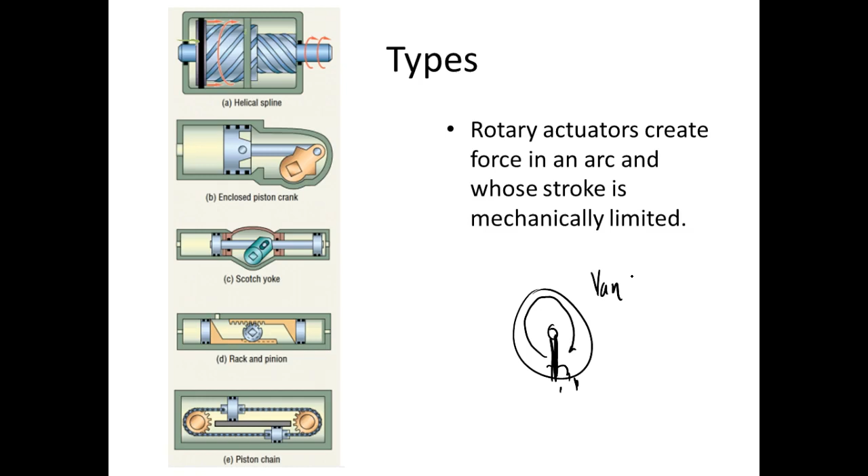Fluid power motors. I know y'all hate these long classes, guys. It converts fluid power to a rotary motion energy, and it has an unlimited stroke. Y'all understand that?

But here we don't deal with area - we deal with what we call displacement. What is displacement? The motors deal with displacement. If I've got a reciprocating compressor that's got one piston in it, then its volume would be the displacement. So what's the displacement, guys?

When I give an engine and I say it's... so we've already talked about this. Kevin, you okay? So what is displacement? You already know, what's displacement? It's how much volume of fluid you can move in one revolution.

So when we deal with motors or actuators, we're dealing with an arc, right? So the stroke is not given. So what we're dealing with is displacement. And we start dealing with these motors. Are we okay?

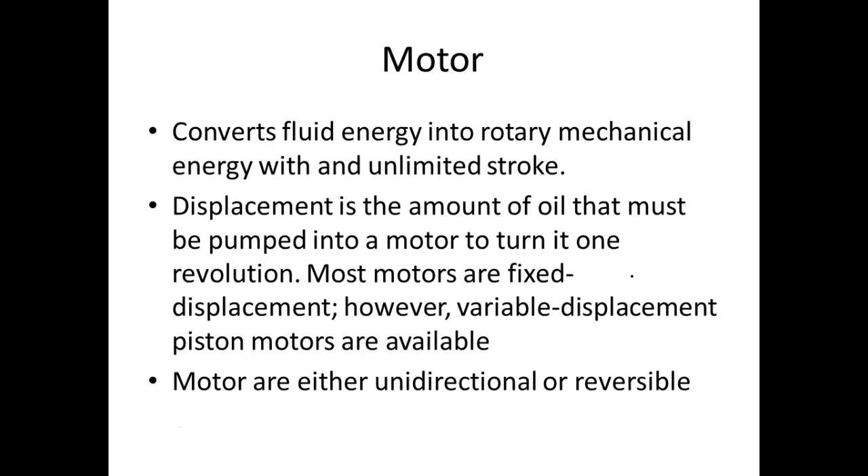Well, so with pumps and also motors, when we start generating force, then we're going to deal with displacement, right? But when we deal with AC motors, we're going to be dealing with horsepower and that kind of stuff. So it's another unit altogether. Here we're talking about fluid.

So here's our symbols. Does that make sense? These are the true symbols. So normally it has a little mark. This would be where we would connect the prime mover. So all your motors, that would be the output shaft. This is the motor.

So do y'all understand the symbols? Yes or no? No? Well, let's look at it. It'd be nice if we understood. So if the arrow's pointing in, it's a motor. If the arrow's pointing out, it's either going to be a pump or a compressor. Here, y'all see the arrows here. So that means fluid is flowing in and not flowing out. So if the arrow points in, it's a motor. If it points out, it's what? Well, it's a power source. It's either a pump or a compressor.

If it's filled in, it's hydraulic. If the arrow's not filled in, it's pneumatic. If it's got two arrows, one on the top and one on the bottom, pointing in, it's a bidirectional motor. If it's pointing out, it's a power source. If it's pointing in, it's a motor or an actuator. That makes sense. So what they're doing is they're pointing the direction of the fluid. If it's pointing in, then it's got to be using that fluid for something. If it's pointing out, it's going to be coming out of the unit, right?

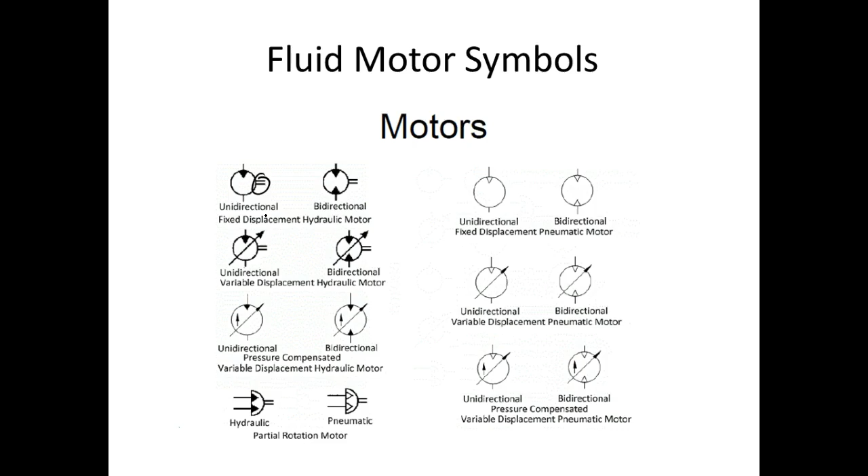So on the right, what are these? Pneumatic. On the left, these are what? Hydraulics. What's the difference in the symbols? Yeah, it's just the arrow is colored in versus colored out, right?

Yeah, so the fluid power motors did not come with the trainer. So Nancy bought those separate. But there were some things she didn't really consider when she bought them. Some of y'all had the problem—you get the motor, and they don't even rotate. So the motor is actually too big for our valve.

Did y'all notice that? Some of y'all had the same issue. Yeah, well, once you override the friction, they ran fine, right? But they all run real slow. Y'all notice how slow the motors run? What's the problem? Well, the motor is actually too big for our system.

I mean, it's fine—I forgot what deal she got. So she didn't get them through Festo, I don't think. I don't think Festo makes motors like that.